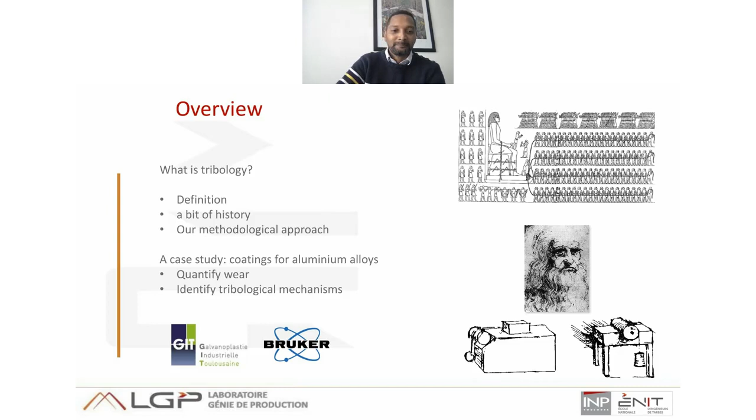The science which studies this problem of friction and wear found its name in the 1960s with Professor Peter Jost. He defined the science and engineering of interacting surfaces in relative motion by the term tribology. This neologism is based on the Greek term tribos for friction and logos for study.

Although the term tribology is recent, it is a problem as old as humankind. Numerous examples can be found in archaeology showing humanity's enduring interest in decreasing the energy dissipated during mechanical effort. For example, a colossal alabaster statue weighing 72 tons was transported over a bed of clay or wood over a distance of 15 kilometers. Here we can see a tribologist - this reproduction shows how the ancient engineer applied lubrication to this mechanism.

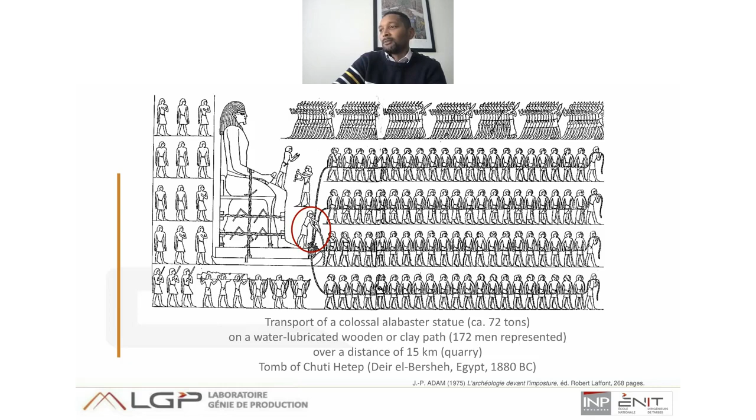In an earlier example, tools involving friction were used for the production of fire. In the Middle Ages, solutions were introduced in various fields for the reinforcement and longevity of structures, for example with cart wheels.

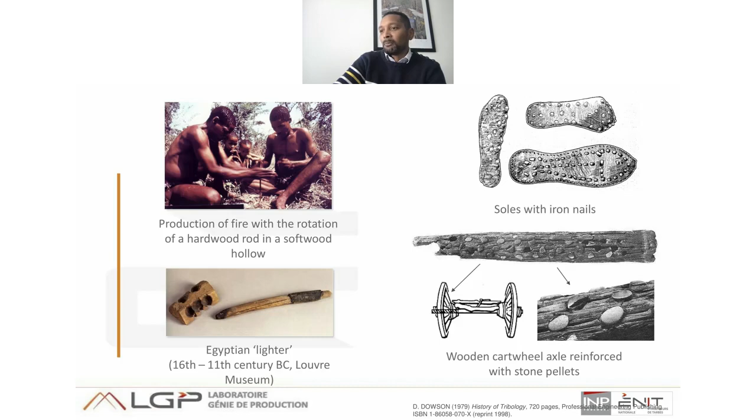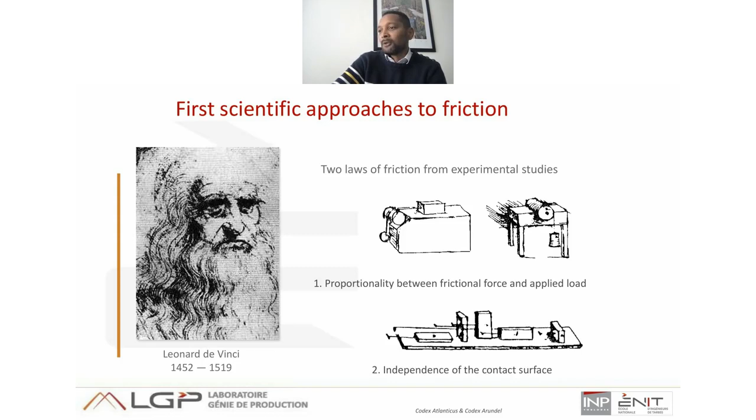The first tribologist, in the 15th century, was Leonardo da Vinci, who carried out the first experiments on friction. He developed the first tribometer and studied various materials. His work allowed him to propose the first two laws of friction. The first concerns the proportionality of the forces involved, the applied force and the frictional force. The second concerns the independence of the phenomena from the considered contact surface.

Later, Amontons rediscovered the laws of friction, which he explained in his memoir for the Royal Academy of Science.

Later again, in 1725, in the Philosophical Transactions of the Royal Society, John Desaguliers discovered the adhesion of solids. In this study, he was interested in the bonding of two spheres of lead strongly pressed against each other.

With Charles Coulomb, various metals and woods were studied in dry or lubricated conditions. These experiments took into consideration the contact area, the applied load, the duration of the contact before sliding, and also lubrication. He formulated a relation that takes into account the works of Amontons and Desaguliers.

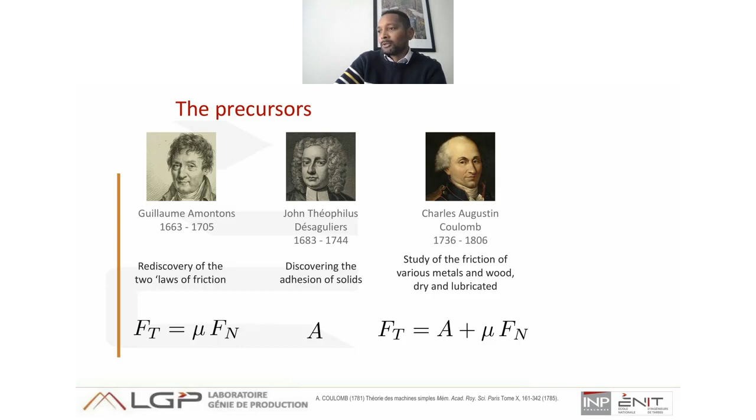Later again, we have Heinrich Hertz, who enriched the static approach of contacts with the non-conforming contact equation. This made it possible to calculate the apparent contact area between two perfectly elastic solids, and to deduce the maximum and average pressure in a sphere-plane or cylinder-plane contact.

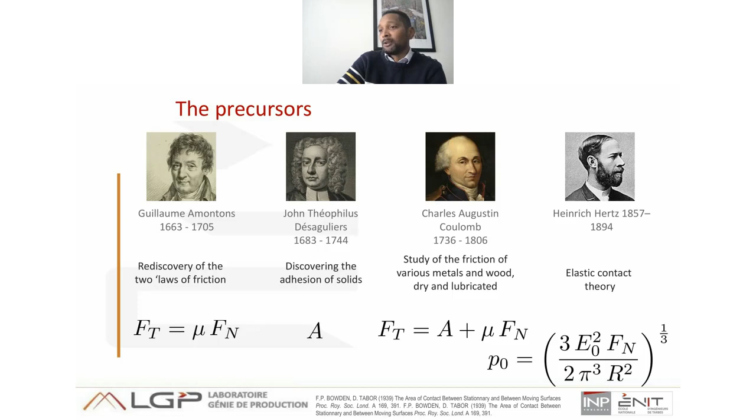In 1950, Bowden and Tabor proposed an approach to contact that has become classic today. They proposed to explain the friction of two bodies at the level of asperities in the contact interface.

This model is broken down into three steps. The first step concerns the formation of the contact: there are shocks and interpenetration of the asperities on the real contact area. Ploughing then occurs - the normal force contributes to the crushing of the asperities, while the tangential force pushes them away. All this happens under the influence of elastic and plastic deformation.

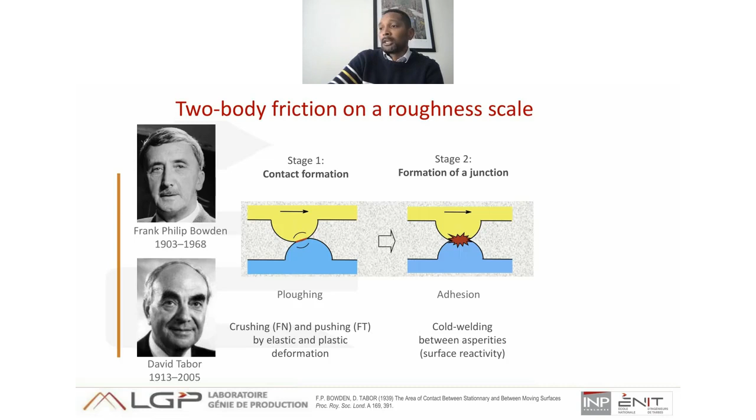The second step is the formation of a junction. The atoms approach each other intimately under the effect of the crushing. There is adhesion and cold microwelding between the asperities, which brings into play the reactivity of the surfaces.

The third step is the separation of the contact. The movement can only continue by shearing the junction. Shear then occurs, material is torn away, there is sometimes severe wear, or the interface breaks apart.

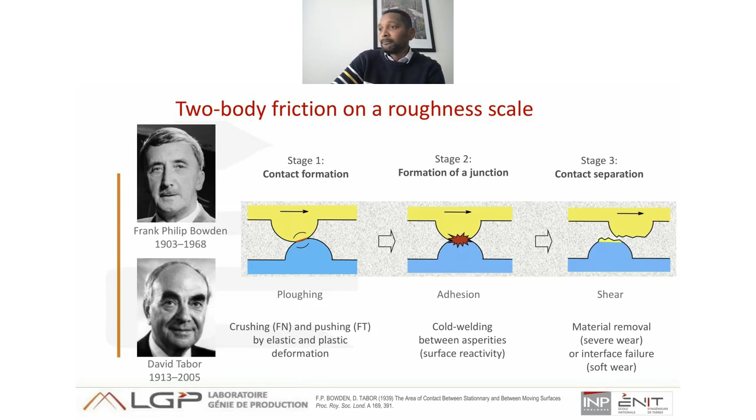In 1984, Godet proposed the transposition of the lubrication model to dry contact with the concept of the third body. The third body designates a set of intercalary elements bordering the masses in contact, the two first bodies.

For Godet, two bodies in contact alone do not exist. The third body can be defined either in the sense of materials or in the sense of kinetics. In the sense of materials, there are interfacial films that mark a zone of compositional discontinuity with characteristic dimensions on the order of 1 to 10 nanometers. From a kinetic point of view, it is a dynamic interface where a velocity discontinuity can be observed, with characteristic dimensions considered to be between 1 and 10 micrometers.

This third body can be artificial, in which case it is a lubricant. It can also be natural, induced by the reactivity of the surfaces or the degradation processes of the surfaces.

Godet also brings a powerful conceptual tool, the tribological triplet. This triplet introduces a multi-scale and multi-physical systemic analysis. The triplet is composed of the machine in which the contact occurs, the element in contact, also called the 2 first bodies, and the interfacial element, the third body.

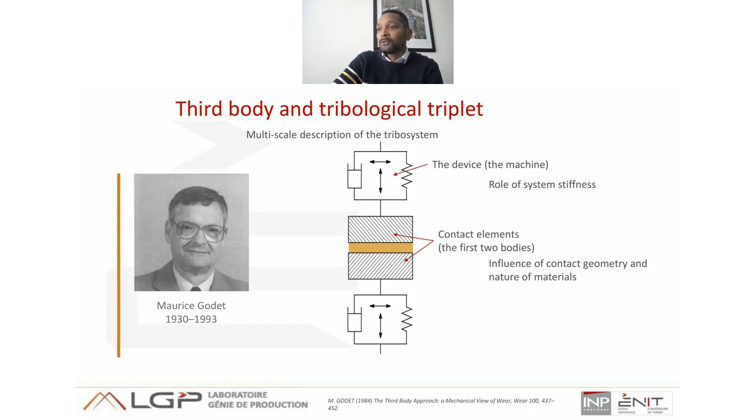The elements in contact, or 2 first bodies, undergo the stress of the device. They react through volume and surface transformation. The 2 first bodies have an influence on the contact geometry and the nature of the material.

And the third body is interfacial. They transmit the load from one solid to the other. They separate the contact elements and flow by accommodating most of the velocity difference between the 2 solids. The adhesion and the rheology of the debris flowing in the contact are significant.

From this systemic view, friction and wear are not intrinsic properties of material, but emergent properties of the tribo system.

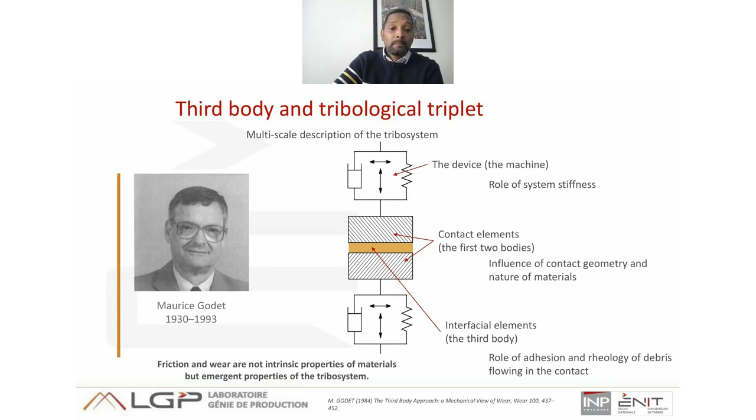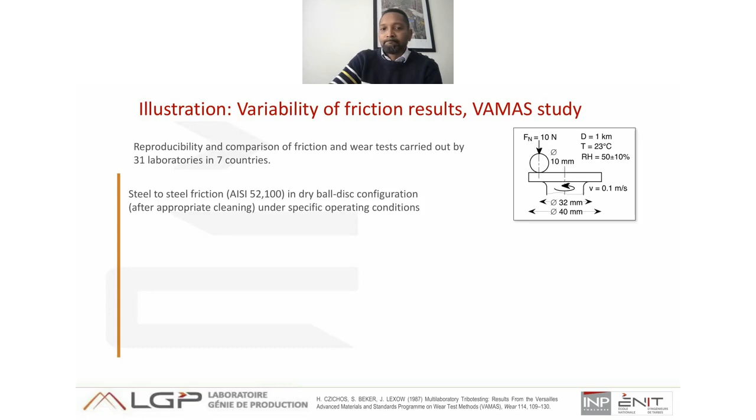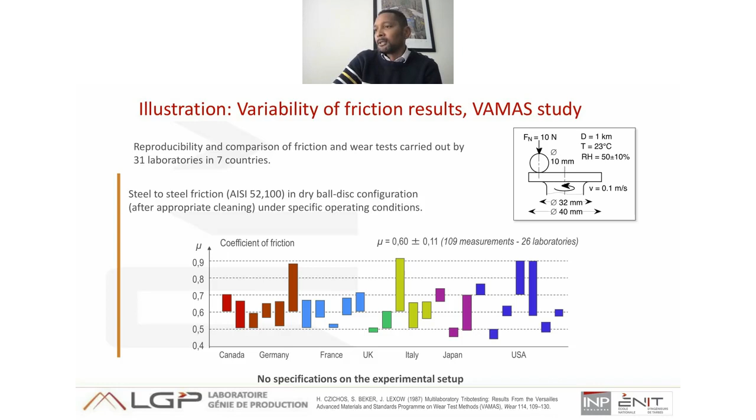The results show very spread friction coefficients, and the compilation of these results shows that there is a huge difference between these laboratories. This dispersion is associated with a lack of specification of the experimental rig, and is due to the differences in stiffness of the experimental rig.

To go further, Berthier has described accommodation mechanisms that identify where the energy is dissipated in a tribo system. He lists 5 accommodation sites.

The S0 site is the accommodation of the device. The sites S1 and S2 are the 2 first bodies. Site 3 is the third body. And he calls sites S4 and S5 the surface film, which is the thin film that appears on the surface of the 2 first bodies.

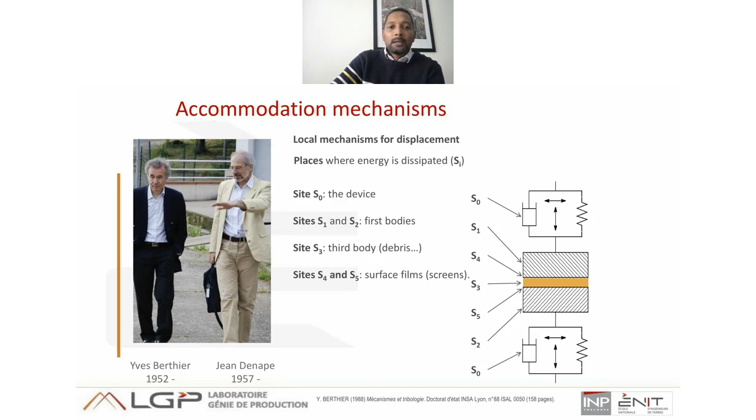He also called these the mechanisms of energy dissipation, and with Denape, he proposed 5 modes of energy dissipation: M0, the elastic deformation; M1, the plastic deformation; M2, the fracture; M3, the shear; and M4, the rolling.

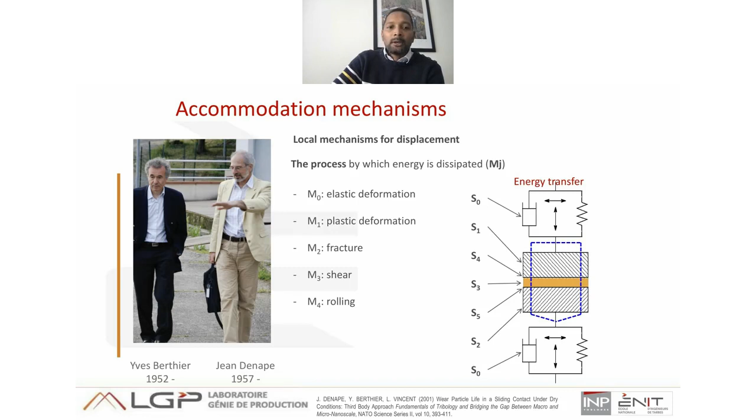In a tribo system, not all these mechanisms appear. You can divide the different sites and accommodation energy dissipation into the following categories.

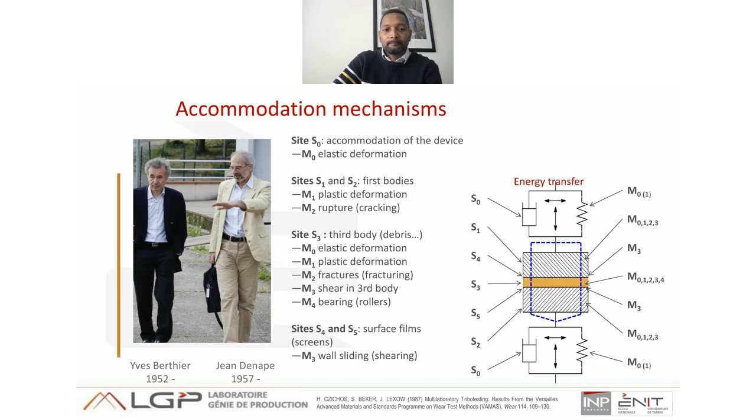Berthier also proposed to transpose the principle of mass conservation to the tribo system. He called it a tribological circuit. It describes the flow of material from the first body or from the outside, such as a lubricant. We call it QS.

He also described the external flow, which is the amount of matter that can return to the contact, and the matter that is definitively lost from the contact. We call this wear.

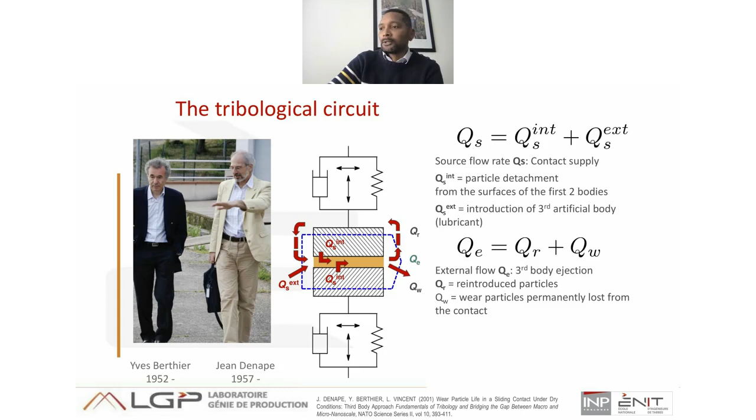The difference between wear and the source flows of matter permits us to calculate the internal flow, or the amount of material associated with the third body. I'm sorry for this equation — this is a minus instead of a plus.

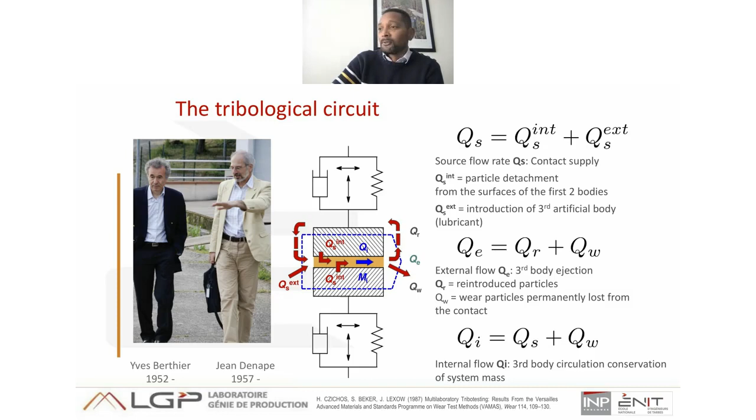So our methodological approach is concerned with tribology. In this science, there is no unifying model and no predictive theory of friction and wear. It's a highly multidisciplinary and multi-scale field. Friction and wear are not intrinsic properties, but usage properties of the materials and the tribo system. These phenomena can be discontinuous, transient, or nonlinear. There is interactive evolution of many parameters, and the contact is often difficult to directly observe.

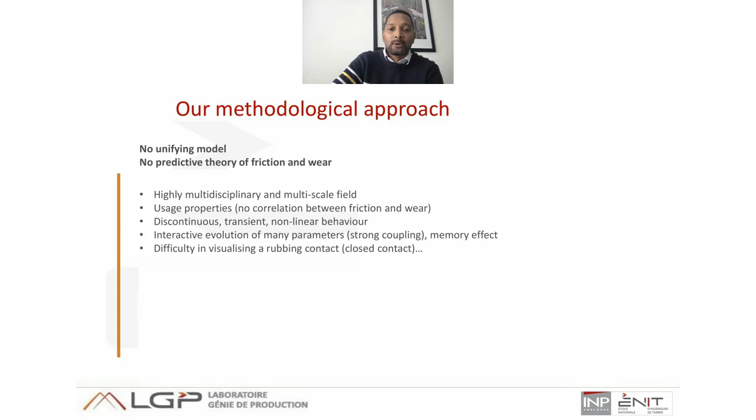We have 3 conceptual tools currently available to understand this phenomenon: the tribological triplet, the accommodation mechanism, and the tribological circuit. With these tools, we have a multi-scale description of the tribo system. We can identify the local mechanisms allowing displacement, and we can regroup the different material flows in and out of the contact.

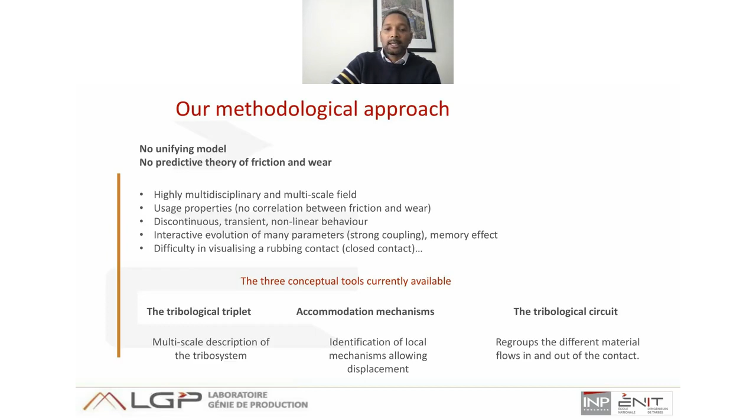Now I will talk about a case study. With the society GIT based in Toulouse, we prepare anti-wear coatings for application in the transport industry, particularly in aeronautics. One of their key products is hard anodic oxidation coating, which I will call OAD.

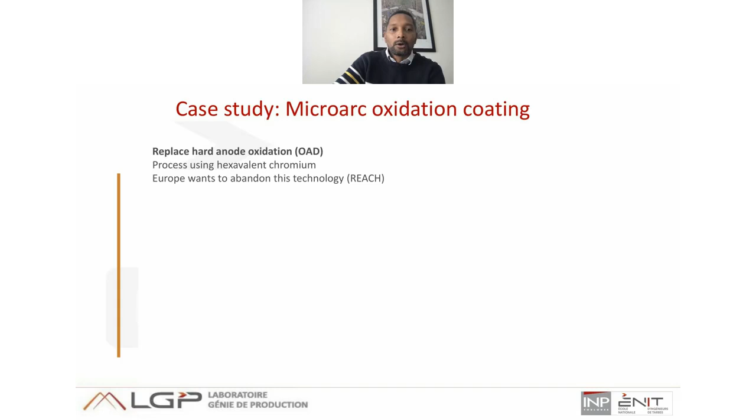However, this coating uses hexavalent chromium, and Europe recommends abandoning this process through the REACH regulation. GIT has therefore launched the production of a coating that respects the REACH regulation. This is micro-arc oxidation, which I will call OMA.

The micro-arc oxidation permits the formation of semi-crystalline alumina on the surface layer. This alumina layer has two parts: a dense part located directly above the substrate, and a brittle part close to the surface.

Here are some examples of the parts that we can produce. Sometimes this process is used to manufacture valve bodies or pinions, and parts can be used raw or resurfaced.

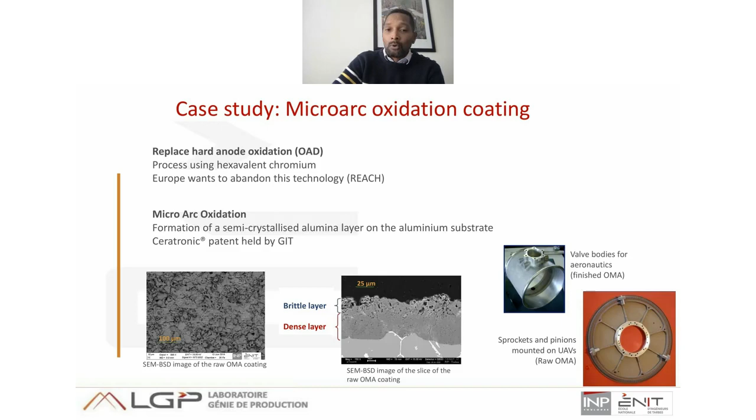We want to better understand the behavior of this coating. Before the beginning of our study, we had a poor understanding of the behavior of this material, so we launched a project to further our knowledge. We want to understand the effect of the brittle layer on the performance of the dense layer produced by OMA, and we would also like to compare it to OAD coating.

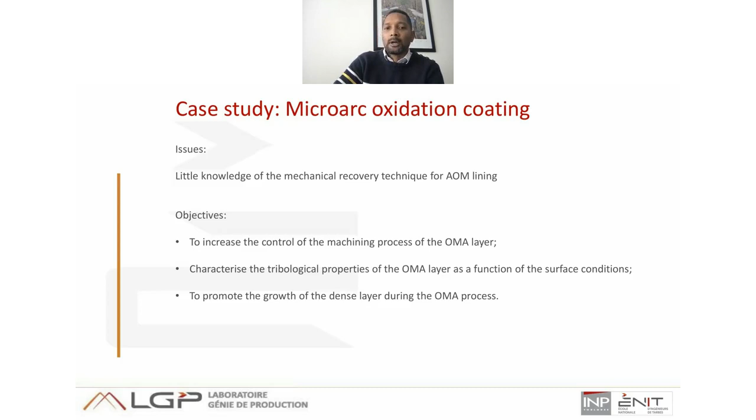We use for our experiments the Tribolab, a tribometer from Bruker. The contact is a ball on plate with reciprocal translation. The normal load is 25 Newton, frequency 5 Hertz, the stroke distance is 10 millimeters, and we present tests at 1,200 seconds, but we can do more or less to study the kinetics of wear.

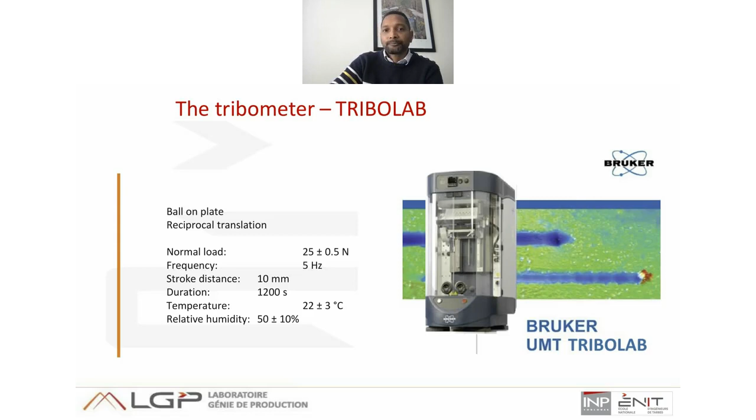We work at 22 degrees of temperature, and the relative humidity can be controlled at 50%. To study the topography of the surface and make a topographic analysis, we also use a system from Bruker, the Contour X200. I present here some specifications for the measurement.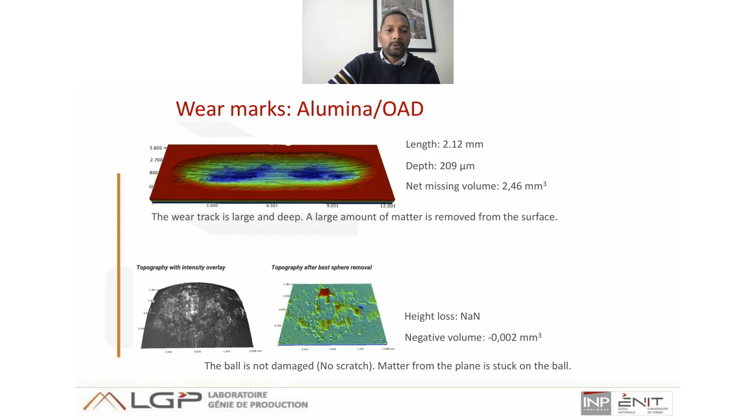When we compare this to a couple of alumina and raw OMA, we see that the length is decreasing. The depth is very low compared to OAD, 30 micrometers, and the net missing volume is 0.5. In this case, I remind you that we also have the brittle part of the coating along with the dense part.

The friction and the wear are principally due to the production of debris from the brittle part. The surface of the ball is now damaged, and there is debris that spreads from the alumina ball in the contact.

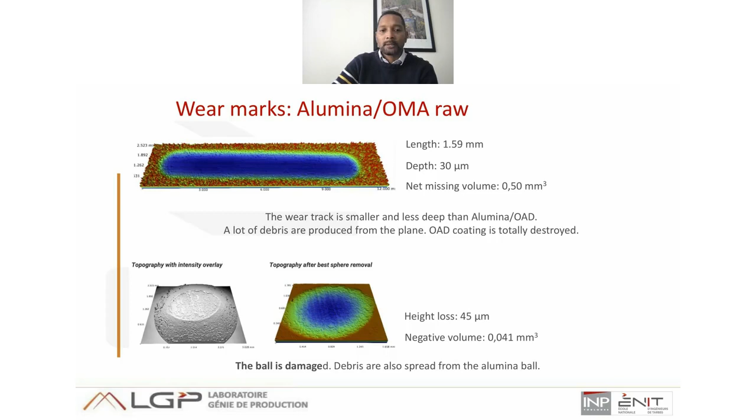When we use milled OMA, we use micro balls to resurface the coating. We have new lengths and new depths that are approximately the same as with the raw material. The wear track is a little less wide, but quite deeper than with alumina/raw OMA.

There is a lot of debris production also, and we see that we have damage on the ball with scratches, and there are a few more debris particles emitted from the alumina ball.

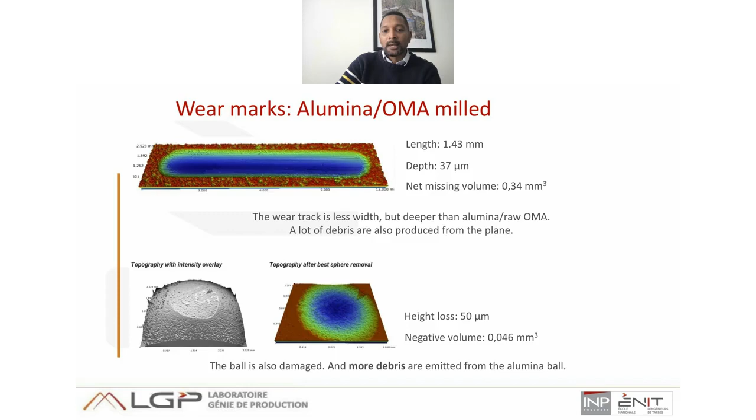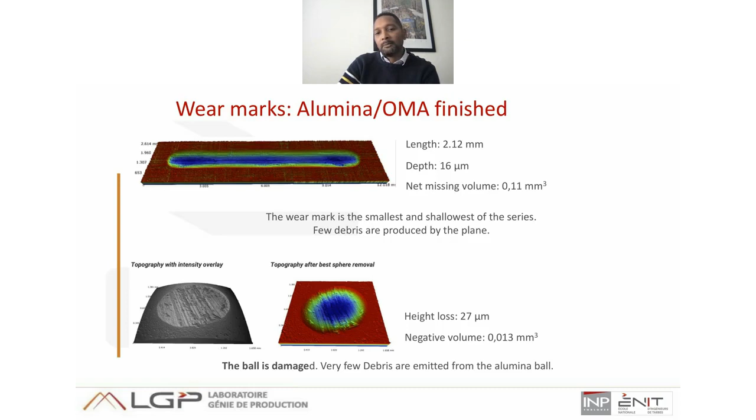Here is the situation in the last case. We resurfaced by finishing the surface on OMA, and the couple of alumina and OMA gives us the smallest and shallowest wear track of the series. The production of debris on the ball is also low - the ball is damaged, but we emit fewer particles.

So we can use all this information from the topographic analysis to build a tribological circuit, as proposed by Berthier. In the first case, with OAD, we see that there is a lot of production of debris from the coating and also from the alumina substrate.

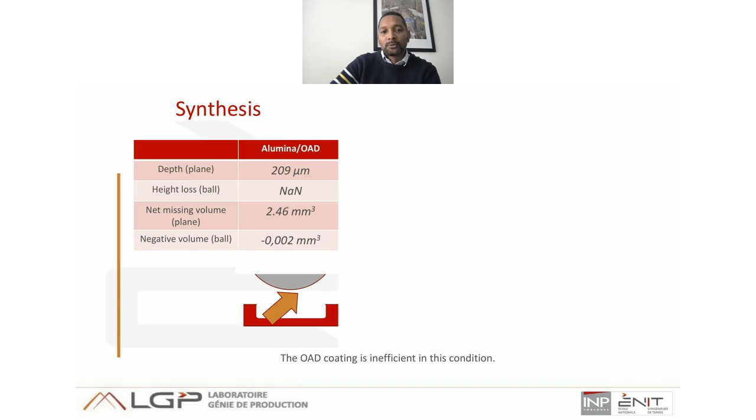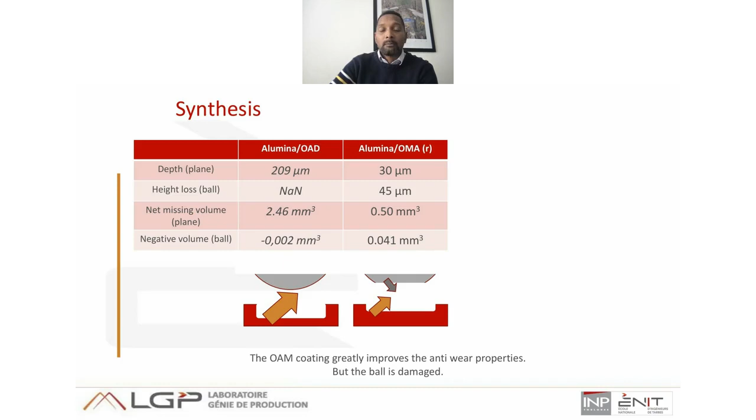After that, with the OMA that is raw, we have less production of debris from the coating, but we also have a new flow of matter from the ball. When we have the milled coating, there is not a lot of modification of the production of wear debris from the ball and from the plane.

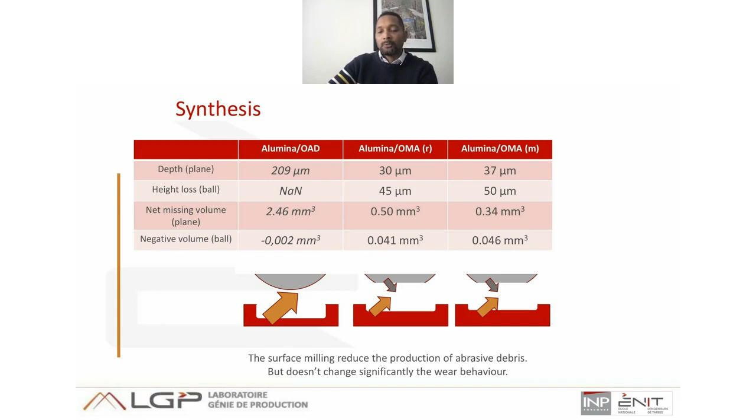And with the finished OMA, we have the least production of debris. We reduce the production of debris from the coating, and we also reduce the production of debris from the ball.

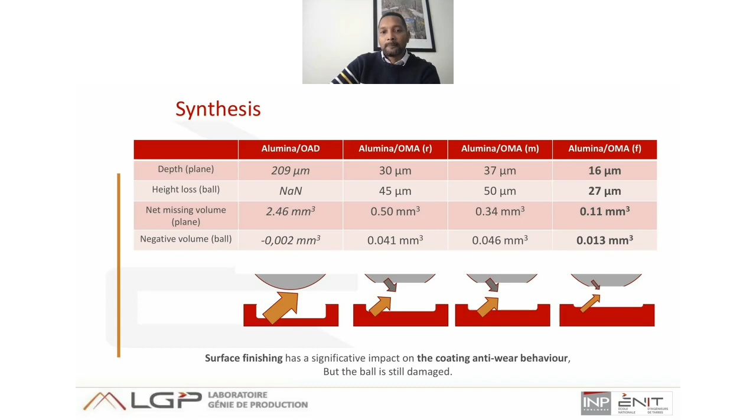So we see how we can use topographic analysis to build a tribological circuit and explain what happened in the contact. We can have also more information from chemical analysis like EDX or XPS, from structural analysis of the phases in contact like with XRD. We can also have more information from mechanical analysis that can improve our description of the tribological circuit and also give information about the accommodation mechanism to explain if there is plastic deformation, fracture, or else. There is also thermal analysis that can efficiently complete the scenario in terms of energy dissipation.

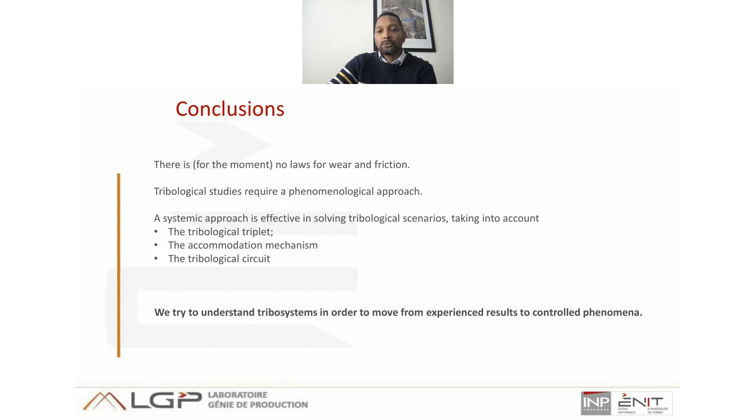So in conclusion, there is for the moment no laws for wear and friction, and tribological studies require a phenomenological approach. A systemic approach is effective in solving tribological scenarios by using tribological triplets, accommodation mechanisms, and the tribological circuit. We try to understand the tribo-system in order to move from experimental results to controlled phenomena. So I thank you for your attention, and I'm open to questions now.

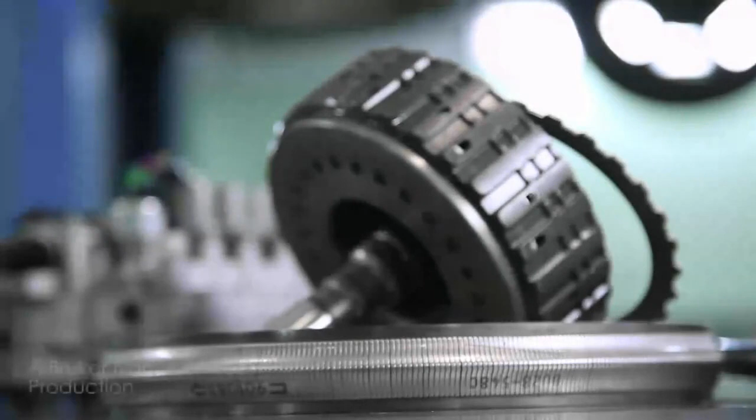The R&D guys do R&D, and if it works, I don't see them because it worked, right? But if they're developing something and they start to have some problems, a typical example might be a clutch mechanism. So they basically design these clutch mechanisms, they put them on dynamometers to test them, and if they start to get noise or they don't get the right friction or whatever it is they're after, then they'll bring them to me and they'll say, okay, this one worked, this one didn't, tell me what you can see. So really, it generally starts with a problem.

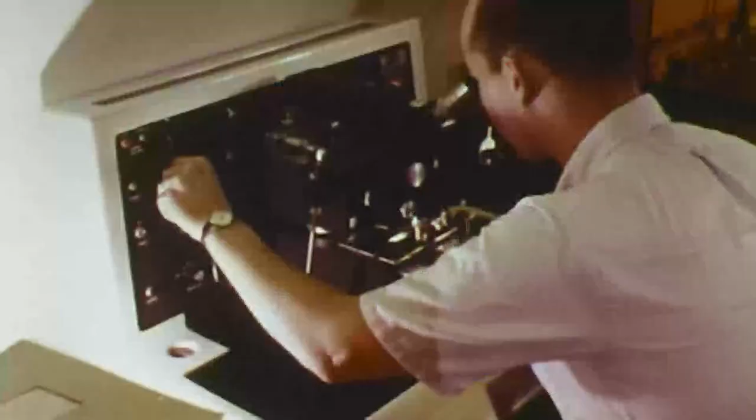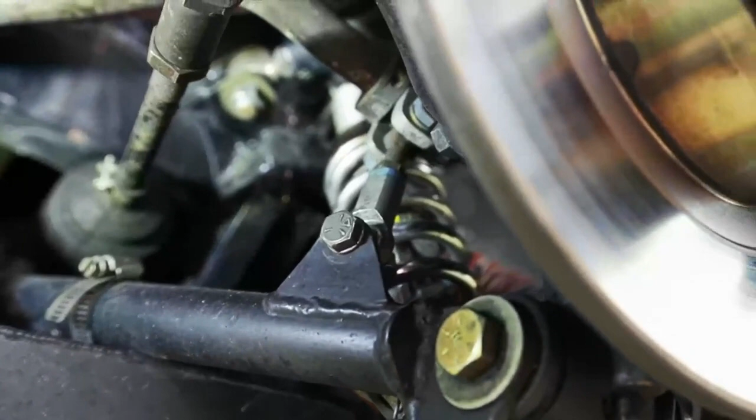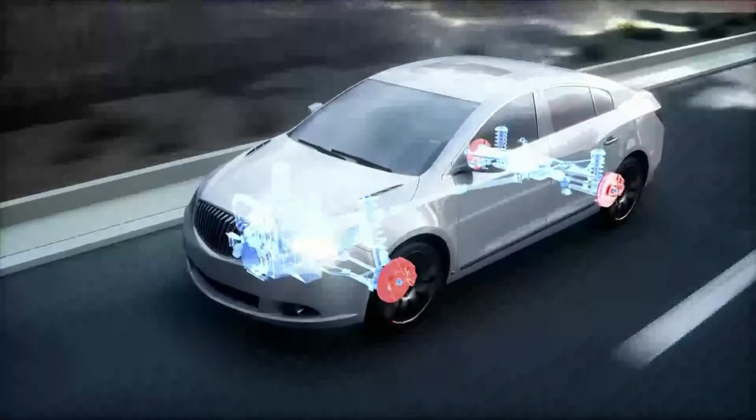What typically happens, I'll get a phone call. Someone calls me and says, hey, I was referred to you by so-and-so, I've got a problem, right? The problem could be anything, like maybe my brakes are making noise or they're not making noise, okay? So the first question you usually ask is actually what I call the scale of interaction. When you say it's making noise or it's not making noise, do you know where the noise is coming from? Is it indeed the brake pads engaging on the brake, or is something vibrating something else? Because if it's something vibrating something else, it's probably not related to my stuff. It might be a structural problem, right? So we've got to deal with what I call the scale of interaction.

Once we get it down to that, this noise is emanating from something like two parts coming together. Then it's a question of, well, what's the size of the parts that are coming together? Can I even measure those parts? Or can we cut a piece of the part away? Or do we have to make what we call a replica of the part, where we actually make an impression of the part and measure it.

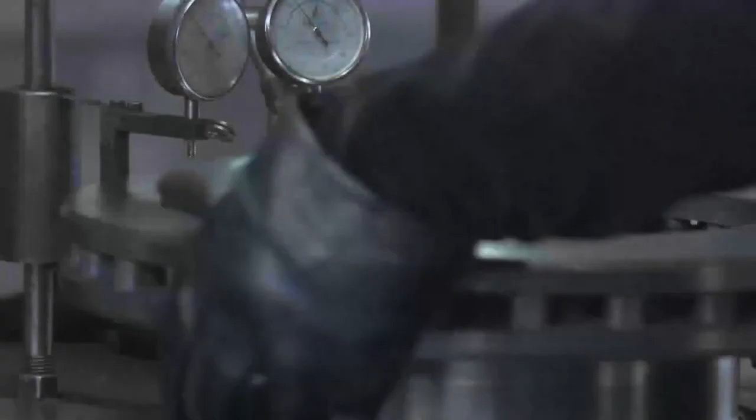A brake rotor on a typical car is pretty much the biggest thing I want to deal with. Even truck rotors, like an F-150 truck rotor, can get pretty big, and it's not that easy to deal with. So that gives you a feel of the size of the part. But most of the time, the tribology problem you're dealing with is acting over a small size.

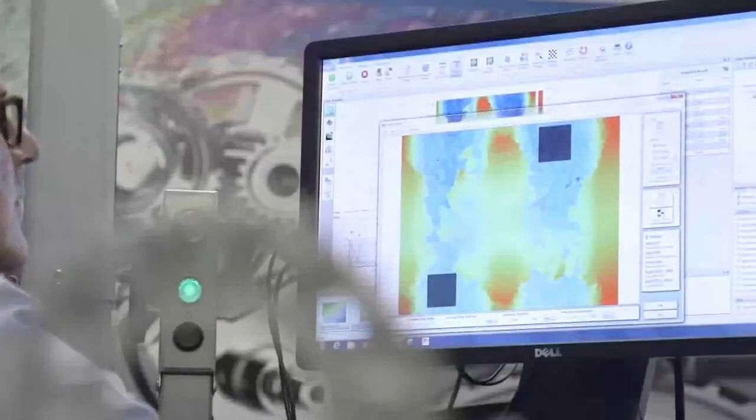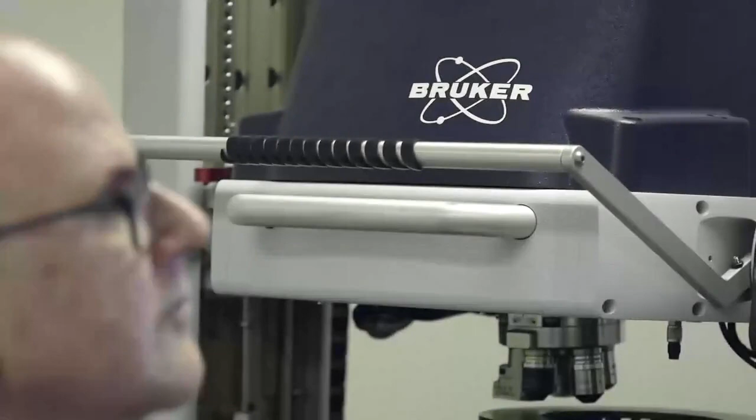So once you've narrowed it down to the interacting components, now it's a question of, okay, can I position the parts in such a way that I can measure them, looking for the surface texture differences between them. For the most part, the instrumentation we have from Bruker can handle pretty much any material. It could be highly reflecting, it could be dull finish. I can measure black rubber surfaces with a little bit of patience, and you can get a really good measurement of that surface texture. So usually most materials we can measure.

The only other thing to watch out for is if the material is composed of multi-layers of films that are somewhat transparent, then that can cause some trouble. Since we're using an optical instrument, the light kind of goes through those transparent films and causes some problems. So you have to be a little bit aware of that. Other than that, as long as it can fit under a microscope, that's why I usually say to customers, if you can look at it under a microscope, I can probably measure it.

And once I can measure it, then it's a question of understanding what the potential mechanism is of failure or problem. If it's a noise issue, if it's a wear issue, if it's a leakage issue, if it's an appearance issue, what is the actual issue? How do they describe it?

I have what's called a Bruker NPFLEX, which is a 3D optical profiler, which allows measurement of large parts and small parts, both in very smooth situations like a super polished mirror, all the way up to a very rough part like maybe a brake rotor or something that's been shot blasted. That's the one instrument I use for surface metrology.

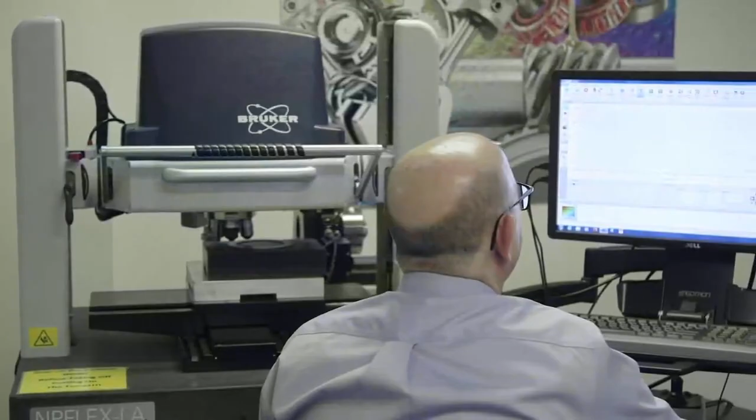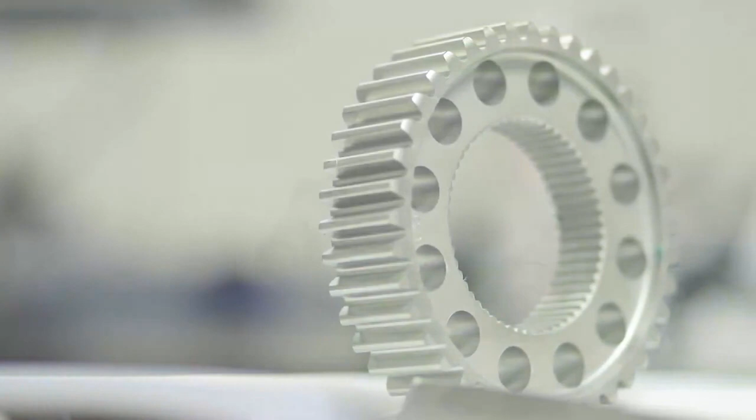And then together with Bruker, we've set up a lab which has a Bruker UMT, which is a universal mechanical tester, which allows the measurement of friction and wear of components by rubbing them together in different configurations, be it a pin on disc, 4-ball test, or whatever kind of configuration you want. So throughout the year, the Bruker people and their experts are here demonstrating the machine and doing projects for people, as well as developing applications for different people in the auto industry.

Tribology is everywhere, all around us. The science of friction, lubrication, and wear provides answers to everyday questions. Which rubber grips the road better? Which coating resists wear better? What material offers the longest life?

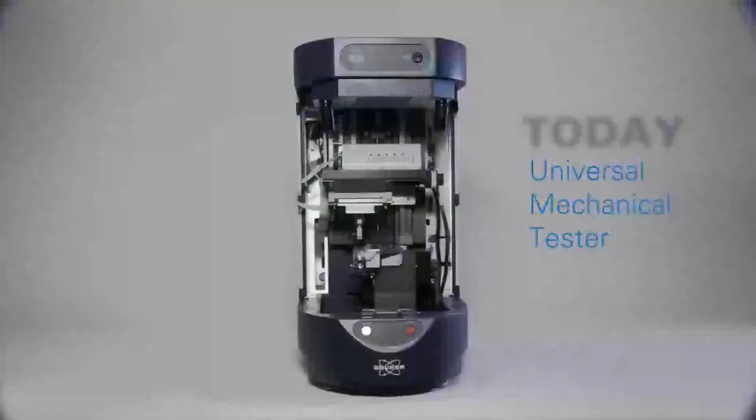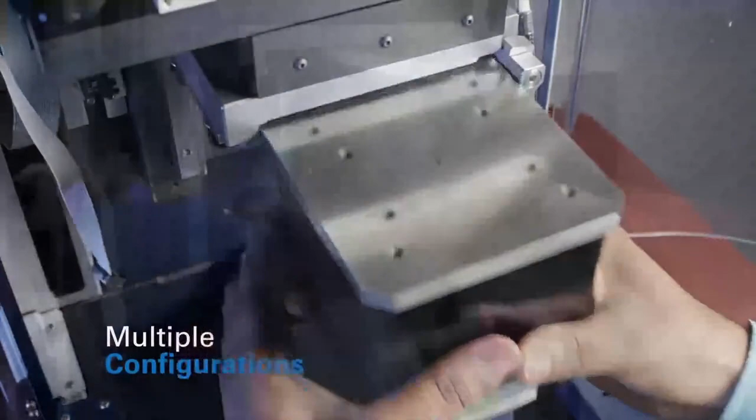The lab itself is an experiment in tribology. Before, you needed seven testers to meet every tribology need. Bruker gives you a complete tribology lab in one universal mechanical tester, configured to run macro, micro, and nanoscale tests, all under real-world conditions. Changing configurations with ease just wasn't possible before UMT. Bruker's UMT makes it quick, easy, and possible.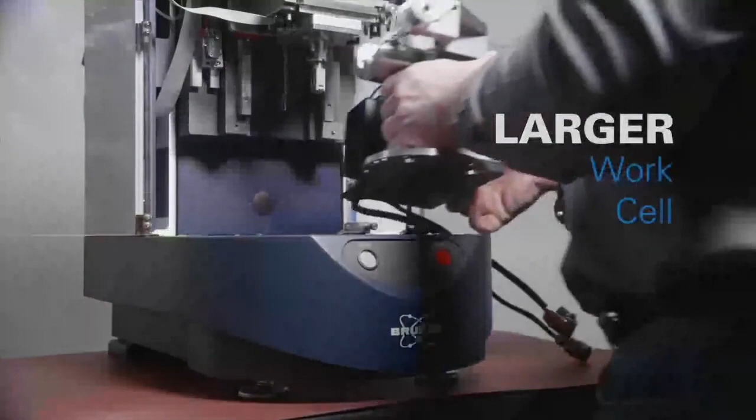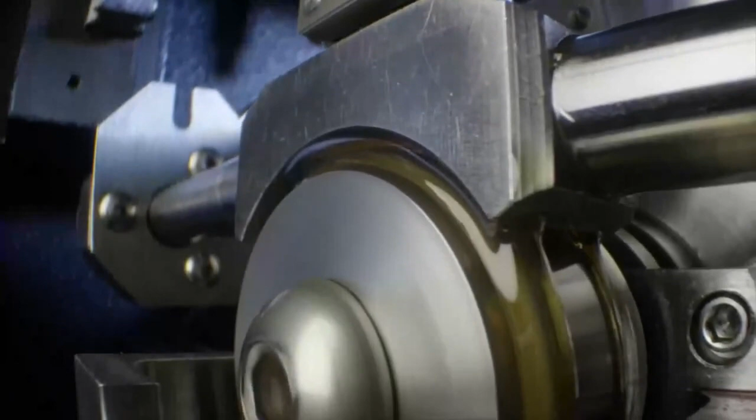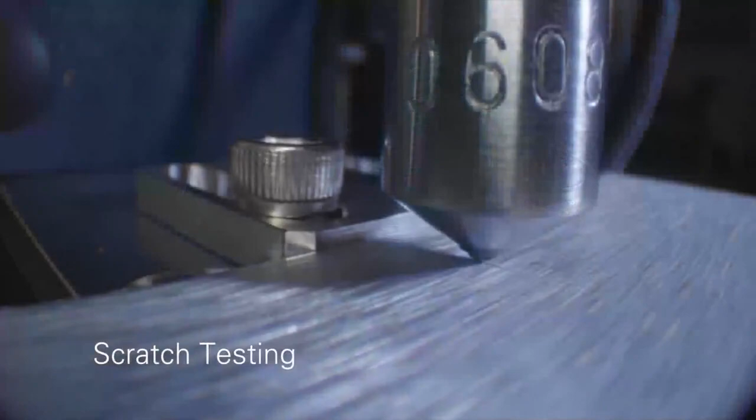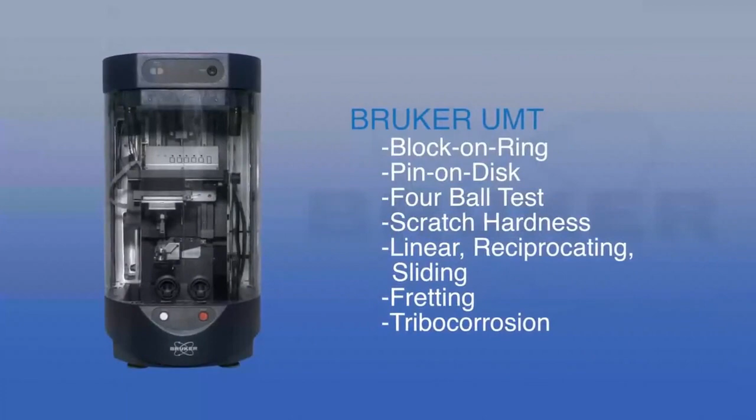We've combined this with a very large work cell with easy access and great visibility, and all of this helps to keep the focus on the science rather than the tools. We designed UMT for versatility and optimized it for excellence in testing material properties, revealing point of failure of coatings by scratch testing, or determining material hardness and modulus through nanoindentation. Bruker UMT delivers versatile tribology and materials testing on a single platform without compromise.